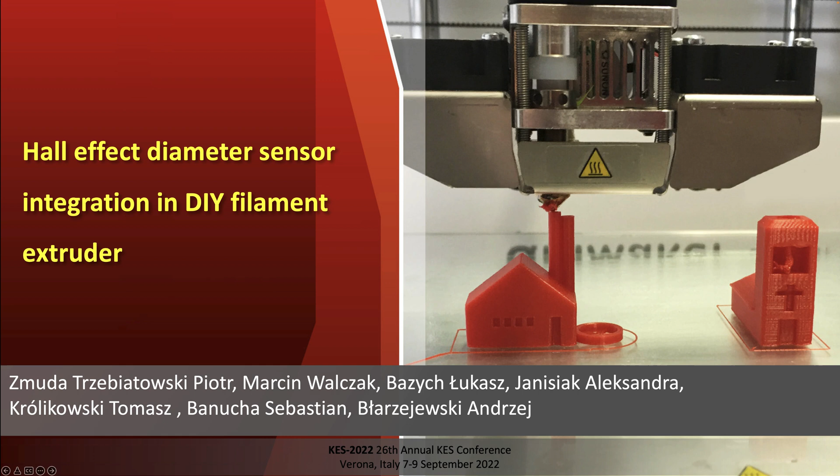Good morning. I would like to present the publication, Hall Effect Diameter Sensor Integration in DIY Filament Extruder.

The rapid increase of 3D printing popularity in public knowledge in the last decade is largely the result of the Stratasys patent expiration in 2009. Additive manufacturing, not only FDM, has its advantages, despite there being many solutions on the market that are far superior in terms of speed, strength and visual properties. They are noticed more frequently by both the scientific community and manufacturers in the last 5 years.

But parallel to the professional community, there is also a makers community gathered around projects like RepRap. With extremely low entry cost, still dropping prices of consumer-level 3D printers and a wide range of cheap consumables, FDM technology is a way to go for many talented young people with ideas. One of them is creation of a do-it-yourself filament extruder to recycle waste materials, supports, failed prints, etc. into a new spool of filament.

While a filament production line price starts at around €50,000, and a desktop-style filament extruder, like 3Devo's Precision and Composer, can cost almost €7,000, the idea of creating a similar, in terms of functionality, machine in the €100–200 range is quite encouraging.

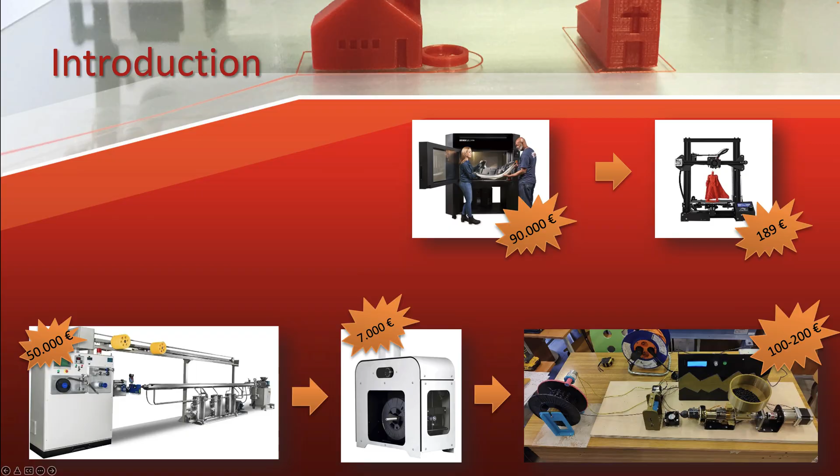The filament extruder is a simple design based on a cylinder barrel with a screw inside. The material, in the form of granules or flakes, is placed inside the hopper, from where the screw, driven by a high-torque electric motor, directs it towards the heating zones. The zones are heated by independent heaters, with the possibility of independent control of their temperature. The melted material is squeezed out through the mouthpiece of the nozzle and cooled.

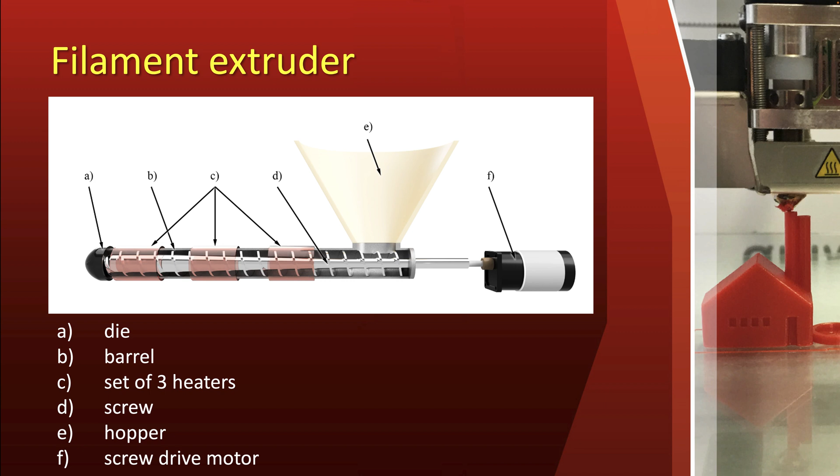In the case of the built device, the material is cooled by air. The key element of the device is the screw. It is responsible for feeding the material from the hopper into the melting zones, increasing the pressure of the material and mixing it. Thanks to their design, proper screw feeders are better able to build stable pressure in front of the mouthpiece, which translates into a more stable outflow of material from the nozzle in the case of uneven flow from the feeder.

Finally, the melted material is formed in the mouthpiece of the nozzle. It is worth noting that the temperature of the nozzle in the filament extruder is definitely lower than in the case of 3D printing. This is due to the much larger diameter of the mouthpiece, corresponding to the dimension of the extruded filament, e.g. 1.75 mm for 1.75 filament.

Thanks to this, the material after leaving the nozzle has a denser consistency and helps to reduce the impact of die swell on filament. Die swell, also known as the Barus effect, is a common phenomenon in polymer processing. In the case of a filament extruder, it swells the filament when it leaves the nozzle. This phenomenon is eliminated in industry by using appropriate mouthpieces and calibration devices.

The last element of the device is the filament winder. An ordinary DC motor drives the spool, on which the material is wound, through a frictional transmission. The use of a friction gear with low pressure allows you to resign from controlling the winding speed and does not impact the calibration procedure.

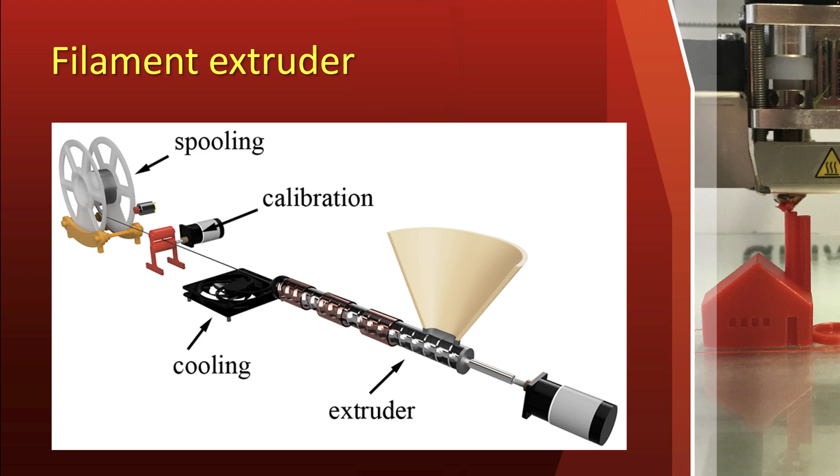The obtained material had an acceptable quality, which made it possible to use it for 3D printing. It should be noted, however, that it differed significantly from commercially available materials. The main reason was the need to ensure constant and consistent flow of the granulated material from the hopper to the mixing screw barrel. Any changes were triggering fluctuations in the filament diameter, which had to be manually detected and compensated by adjustment of the calibrator motor speed.

Unfortunately, the simplicity of the entire device has a significant impact on its functionality and usability. The most important of them are manual control of filament dimension, an extensive calibration process, and no automatic control system for the obtained product. The hardship of preparing the device for proper operation is associated with the long-term process of selecting operating parameters. Some of them must be made once, such as the selection of the correct temperatures of the extruder zones for a given material. But the calibrator motor speed should be constantly adjusted during the process to compensate for heterogeneous pressure changes in the extruder.

The next step, dictated by the imperfections of the project, was the decision to add a filament diameter sensor, allowing to monitor the process and provide feedback to the control system. Taking into account that the main problem was the obtained filament diameter, and in order to keep the costs of the student project as low as possible, it was decided to implement a simple meter based on a linear Hall sensor and an Arduino-compatible board.

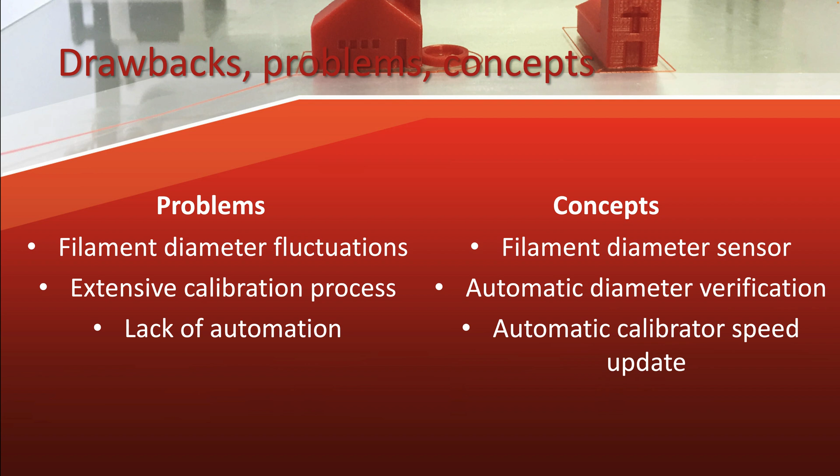An open-loop system does not provide any feedback from the output of the production process. As a result, there is no possibility to self-correct and adjust the parameters. Human action is necessary to check the process and modify parameters. In contrast, there are closed-loop systems where sensors are used for monitoring and self-correction.

At this point, the only available sensors in the constructed extruder were 3 thermistors, used for monitoring and controlling heaters through the controller. Adding an additional diameter sensor to the system will enable the possibility for monitoring filament dimension and allowing automatic calibrator motor speed adjustment, Figure 5.

Since a contact sensor will be used, it is necessary to place it behind the cooling zone to avoid deformation of the filament during the measurement. An open design by Thomas Sanladerer was used as the basis for the preparation of the sensor.

In this project, the filament is routed between 2 bearings, and the change in the distance between them moves the magnet placed on a long lever, changing its distance from the Hall linear sensor. A huge advantage of this sensor design is the minimal pressure of the upper bearing on the filament, caused by counterbalancing bearing weight by the magnet mounted at the second end of the lever.

A second benefit of placing the magnet on the lever is multiplying the travel distance, which allows increased readings resolution. The sensor consists of parts made in FDM technology, a small neodymium magnet, a Hall 49E sensor in the TO-92 housing, 4 608ZZ bearings, and 3 sections of 8mm shaft.

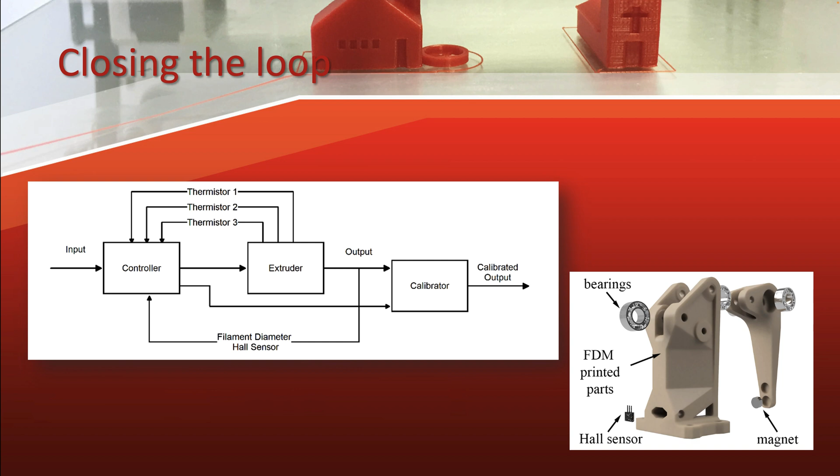Thanks to the use of the 49E linear sensor, it is possible not only to detect the magnetic field but also to determine the change in its intensity, which in our case makes it possible to read changes in the diameter of the filament. To avoid complicated mathematical operations and additional strain on the Arduino Nano, a lookup table, LUT, was used to convert the value of the magnetic field strength to a distance in the project code.

This solution simplifies the implementation of the whole and allows quick calibration of the sensor. Calibration was performed by placing elements of known diameter or thickness between the sensor's measuring bearings to read the value of the raw data for a given measurement.

Correlated raw values, measurements of magnetic field, and corresponding values were then entered into the LUT. The created array allows quick verification of whether the raw data being checked have their equivalent in the array. In their absence, values can be quickly estimated based on the existing ones.

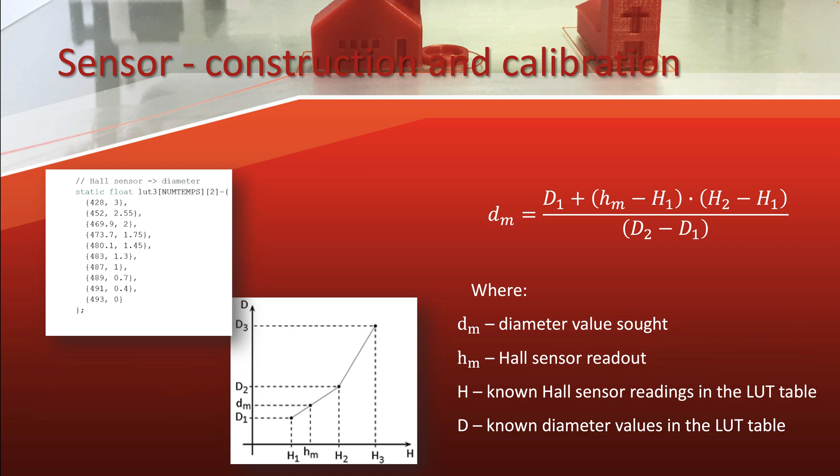The resulting diameter value is then compared with the expected 1.75mm, the most commonly used filament diameter in FDM devices, assuming an accuracy of plus or minus 0.02mm.

If the result is within the tolerance range, Arduino sends only information about the current filament diameter through the serial port to the controller. In other cases, commands are also sent to gradually increase or decrease the calibrator motor speed for too large or too small a filament diameter, respectively.

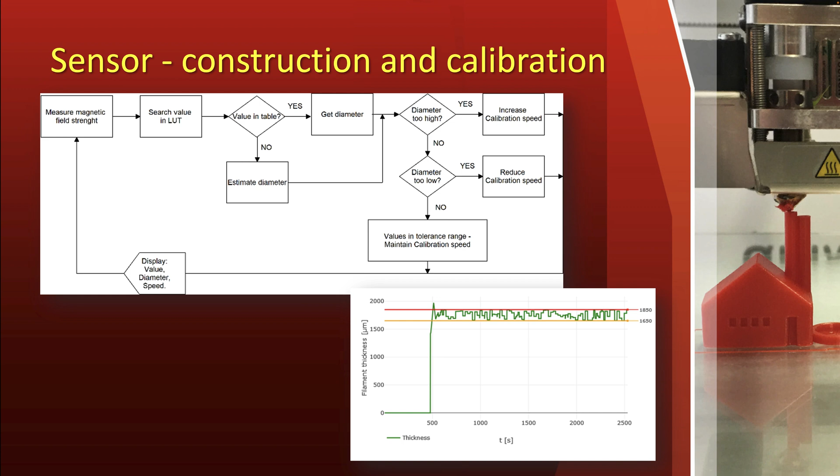The scheme of the program is presented on the slide. Multiple tests were performed with the sensor installed in the extruder assembly. Depending on the accuracy of the initial device settings, typically sensors are allowed to stabilize the filament diameter in less than 2 minutes and keep it within plus or minus 0.1mm tolerance throughout the process.

The sensor certainly fulfills its function. Its assembly allowed not only to speed up the start of the process but also made it much less time-consuming for the user. The feedback loop to the controller accomplishes its function and enables automation of the filament calibration process, and the resulting product is usable.

This can be seen especially when comparing the spools with the material prepared before its installation. However, the obtained tolerances of plus or minus 0.1mm do not allow the material to be used for precise FDM prints. It would be optimal to achieve accuracy at the level of plus or minus 0.05mm.

The use of the sensor also did not allow an increase in the speed of the entire device. As the speed increased, the filament reaching the sensor was not sufficiently cooled and began to deform. On the other hand, tests with an extended cooling zone significantly decreased the calibration process quality. Not only did the material deform under its own weight, but the increased distance between the nozzle and the sensor drastically amplified the inertia of the entire system.

The filament extruder prepared as part of the student project was a great experience for the team in the field of mechanics, control systems and programming, both at the stage of creating the device prototype and during its successive expansion. Comparing the applied solutions to commercial ones, analysis and solving problems brought results and allowed us to draw conclusions.

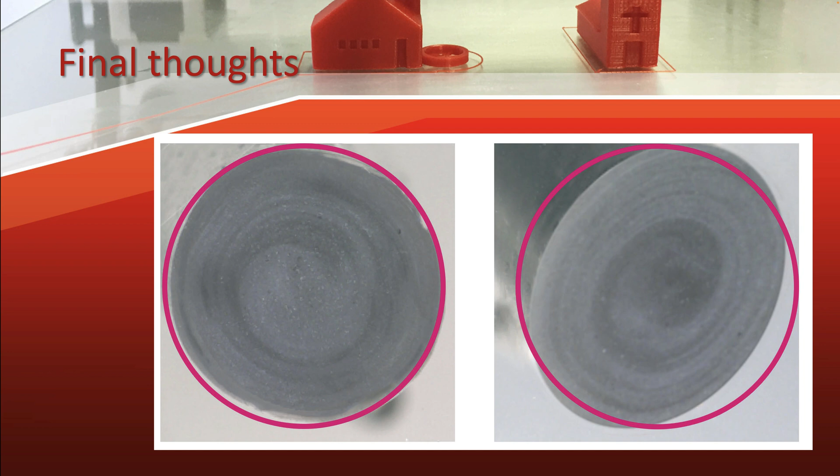Another idea is to cool the filament with liquid, as is the case in industrial production. The liquid will not only allow for faster cooling of the material, but also, thanks to buoyancy and surface tension, it will allow the cooling zone to be extended. A more efficient and longer cooling zone will allow acceleration and stabilization of the whole process by reducing material hanging in the feeder and more stable pressure building in the mouthpiece zone of the nozzle.